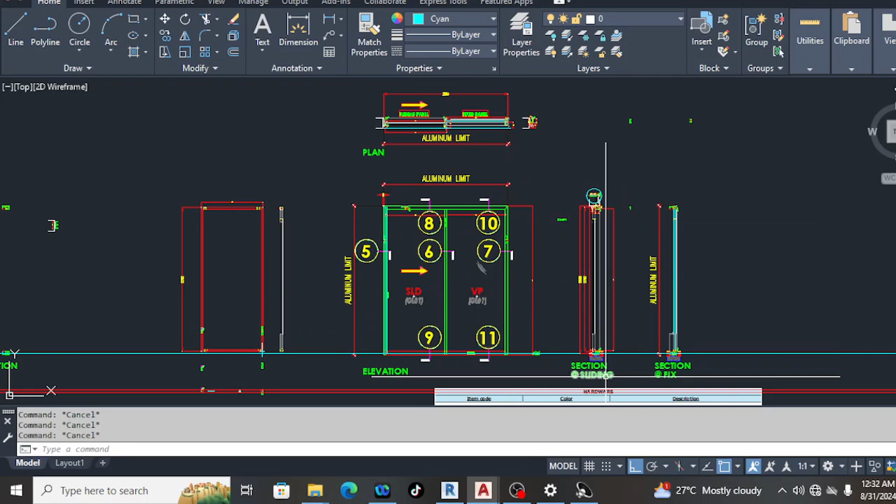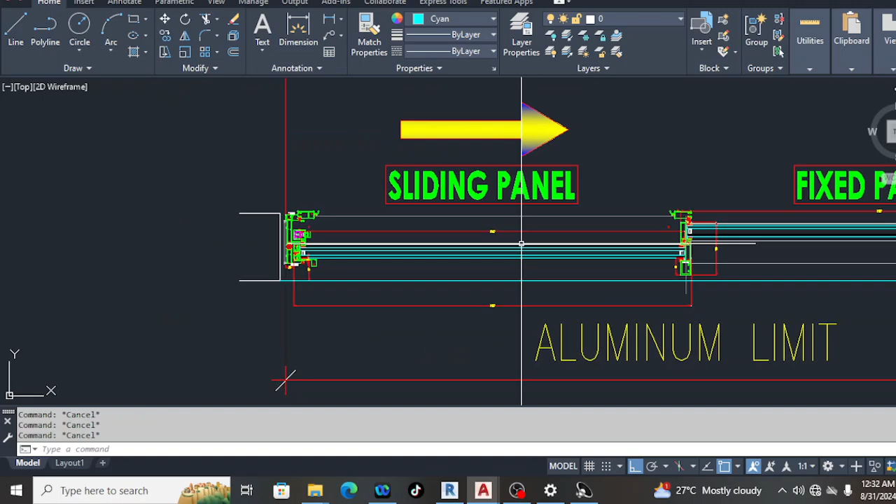I want to share this video about the proper way of modeling sliding doors in Revit. As you can see, this is the elevation of the sliding doors, and we have sections, the sliding section and the fix section. On the plan, this is the sliding panel and this is the fixed panel. It's going to slide left to right, right. This is the detail.

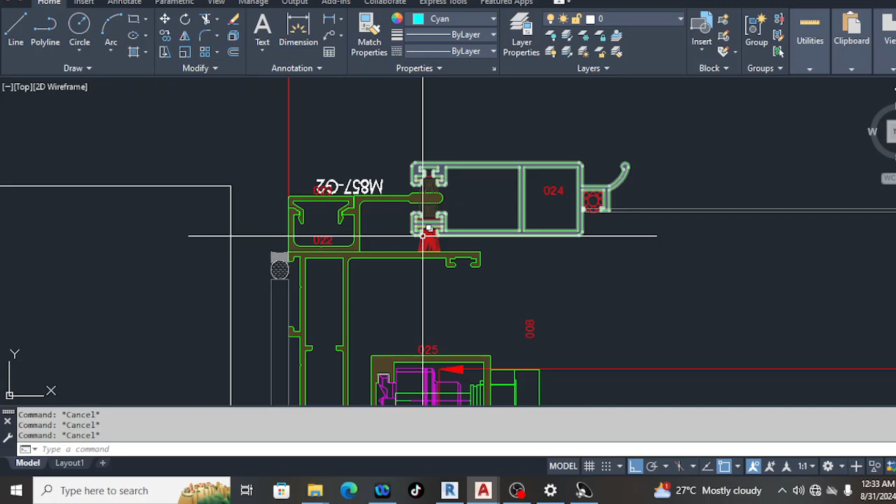We're going to make this AutoCAD detail into Revit. Look at the detail, there's the detail. I did not model the net, the mosquito net, but I modeled the door frames, the outside frames, and the panel frames, the single sliding panel and the fixed panel.

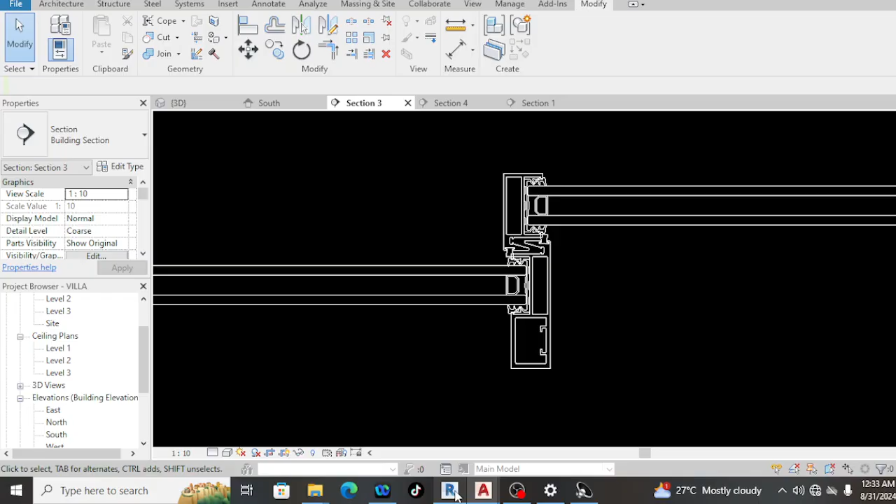And this is our model in Revit. As you can see, this is the interior, exterior. This is the proper way of modeling the sliding doors in Revit. When you see the elevation, there's the elevation. You have two sections and one plan.

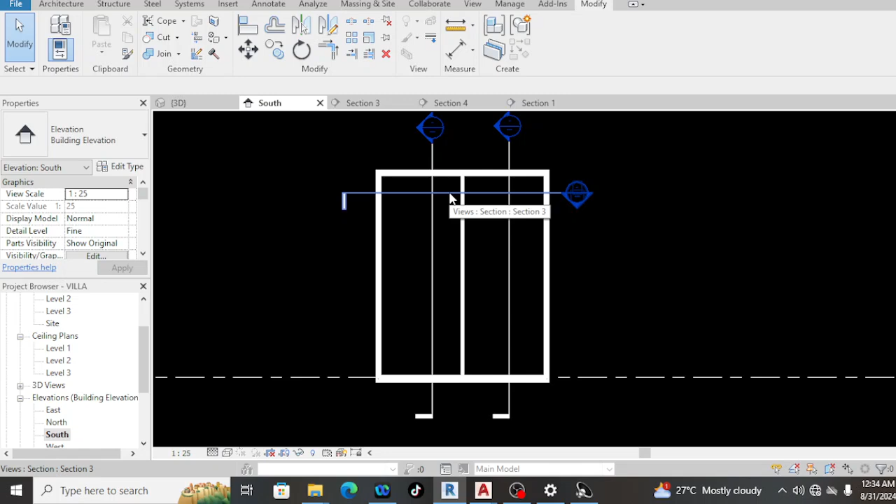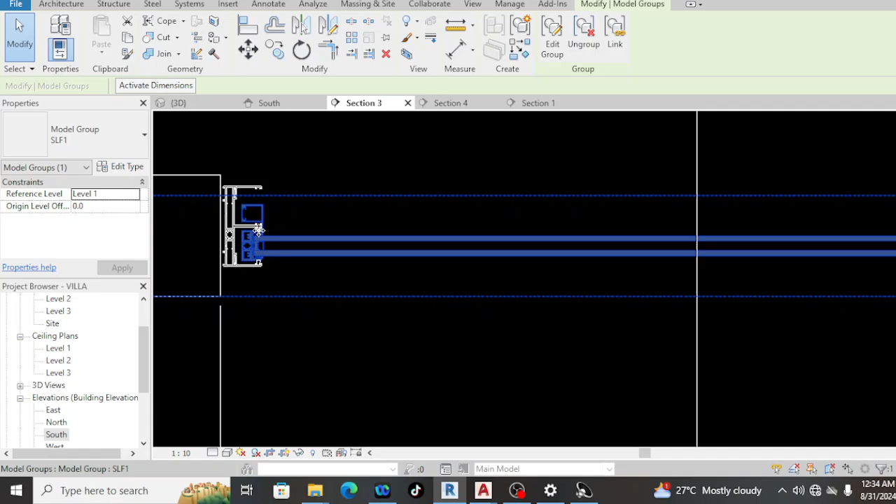Let's go to the view of the plan. You have the sliding panel. We have the detail of the sliding panel here. As you can see, this is the outside frame and this is the sliding panel.

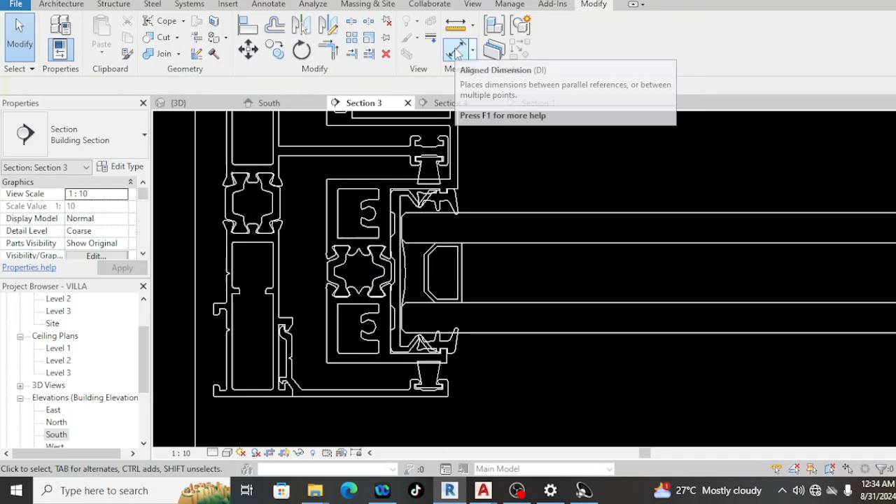Let's look at the glass. We can model and dimension the glass. Let's dimension the glass from here to here. The thickness of the glass is 8, and the total thickness of the glass is 32.

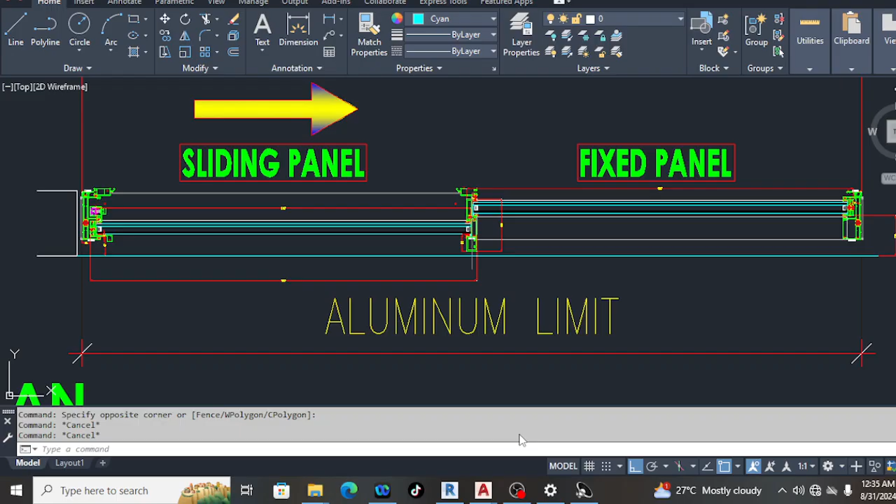Let's go to the AutoCAD file. So 8, the thickness of the glass is 8, and the total thickness of the glass is 32. So we met the requirements. Let's go back to our...

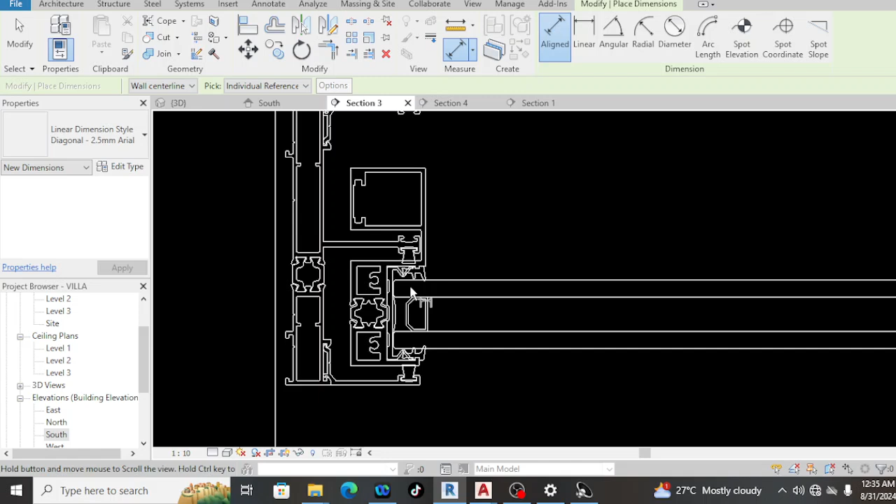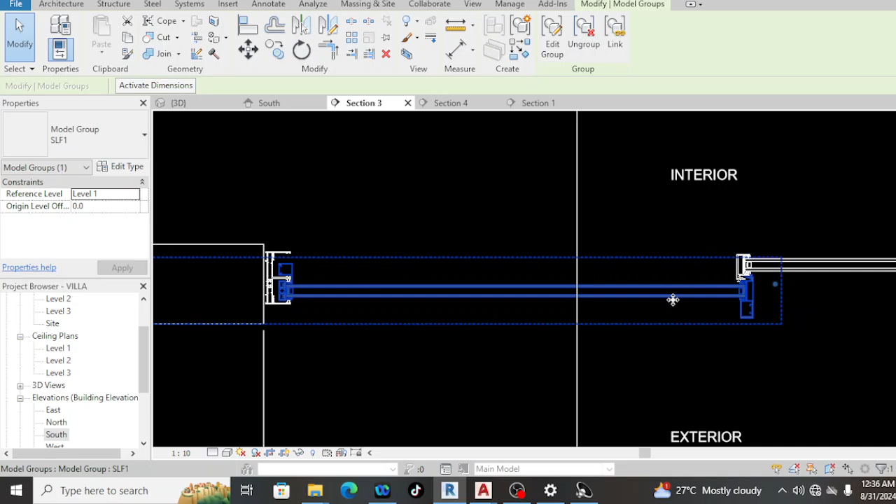Revit sliding panel. As you can see, this is the panel of the sliding doors. When you press the cursor, the arrow to the left of your keyboard, just press it, it's going to move. It's going to slide to the right.

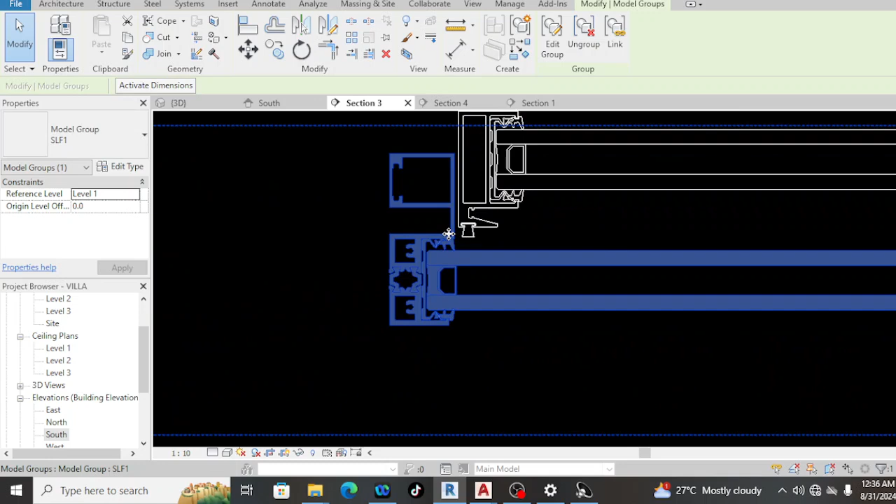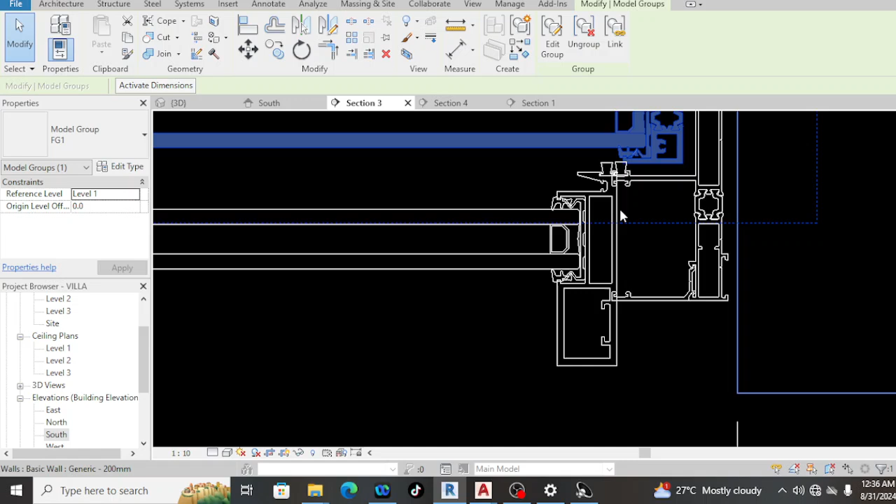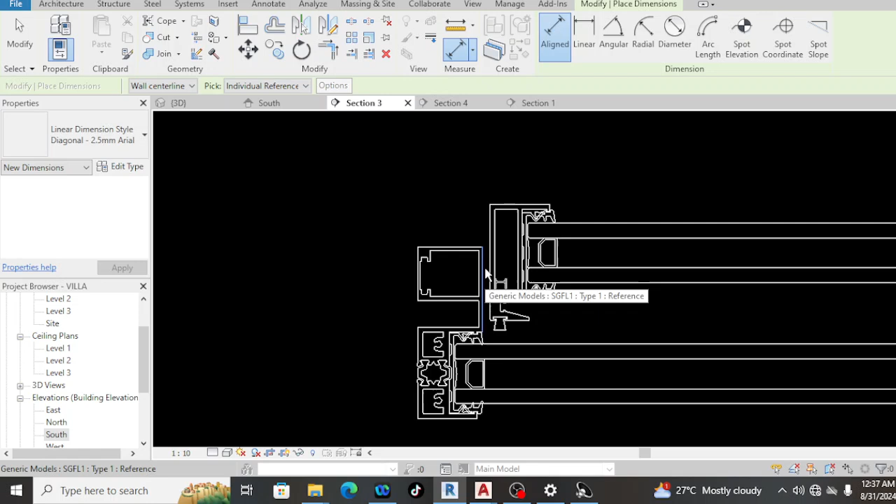And while sliding to the right, look, there's the stopper. So see, it's going to stop here when it's going to clash on the face of the fixed panel. We're going to look before the clash is going to hit, there's a gap of 4 mm between the sliding doors and the fixed panel.

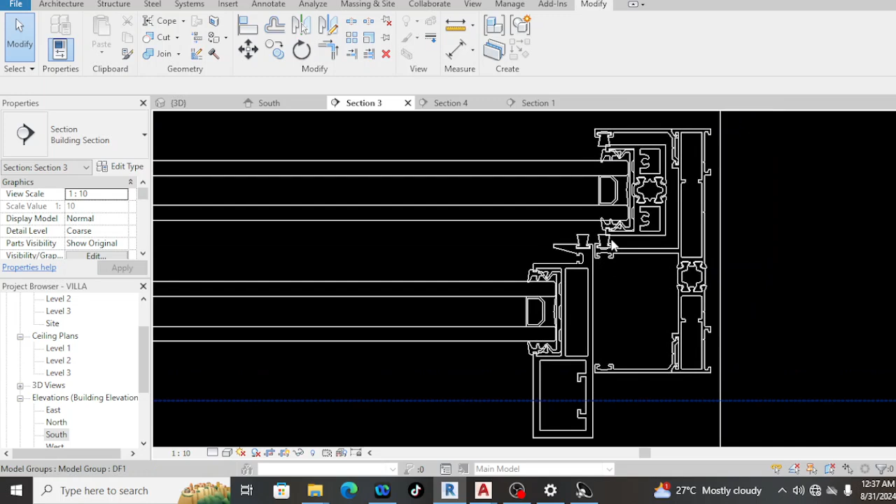There's the detail, here's the detail of the door frames. Let's go to the elevation. This is the elevation. As you can see, let's press again the arrow key to the left. Look, it's going to move. So this is a parametric family.

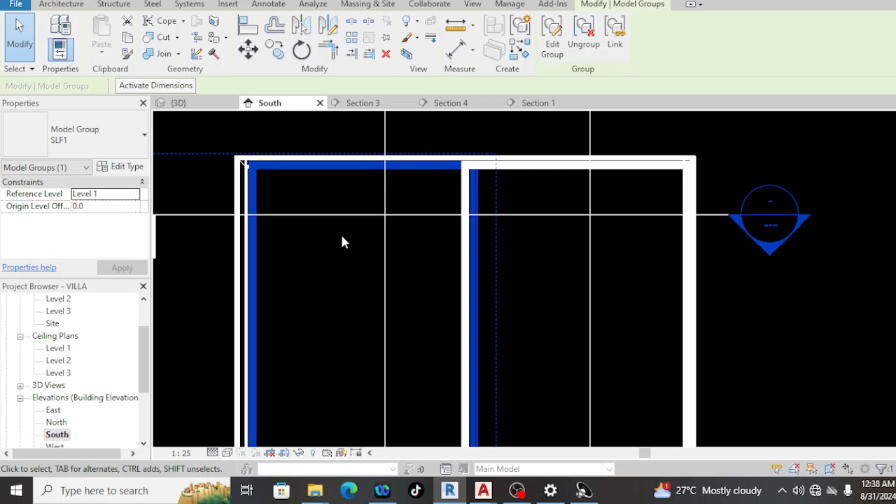We have a pane, the sliding pane. When you press the arrow key to the left or the right, it will slide. Let's look at the stopper in the middle of the detail, mid detail of the sliding doors. Let's go to the plan again, the view of the plan. It's going to hit at the stopper.

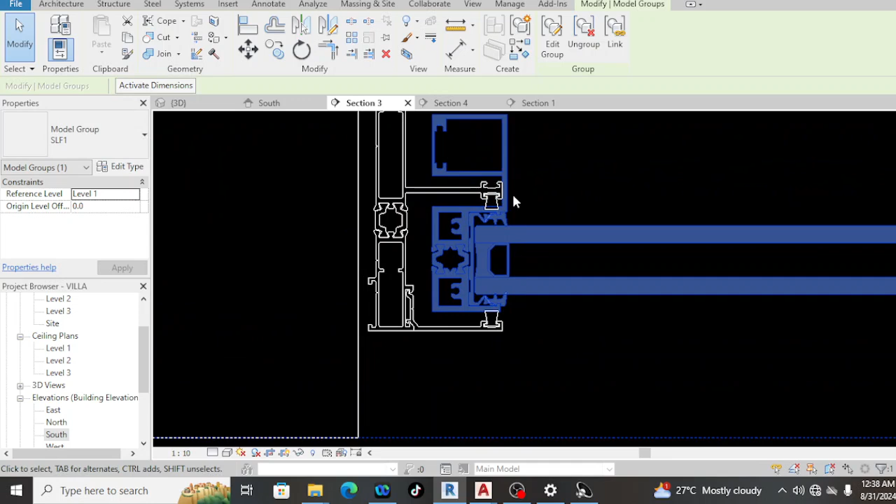There's the stopper. Look, before it hits here, it's going to stop. Look at the mohair brush, even the mohair brush I'll model it. The gasket, there's the gasket, also the spacer for the glass.

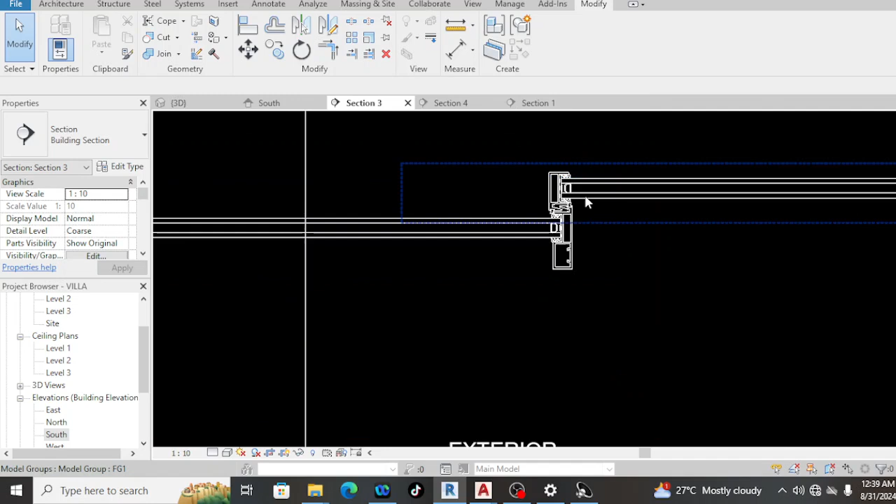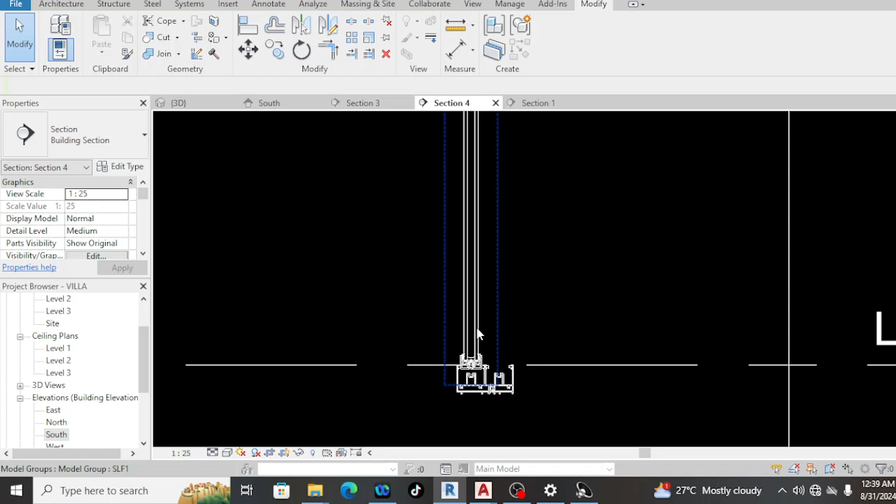Let's go to the section. When you look at the section of the sliding panel, this is the sliding panel. I did not model the roller, there's a roller on this part so that the sliding panel will smoothly turn left to right, smoothly open. This is the top detail.

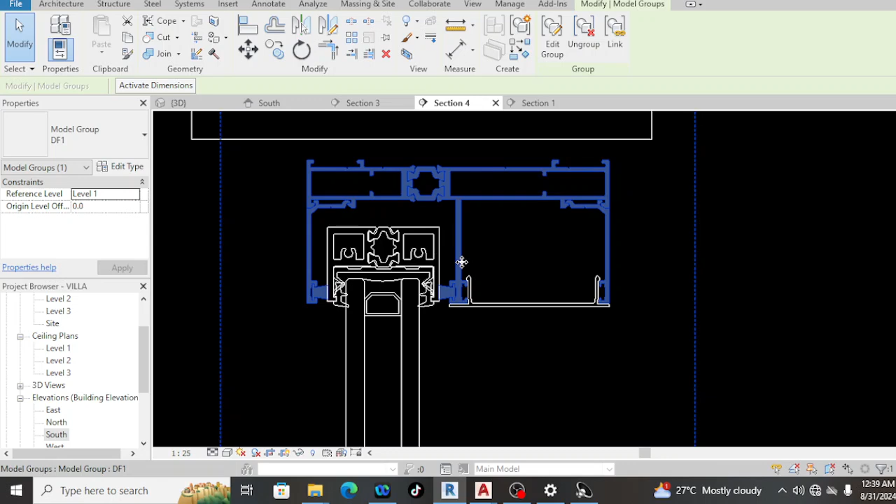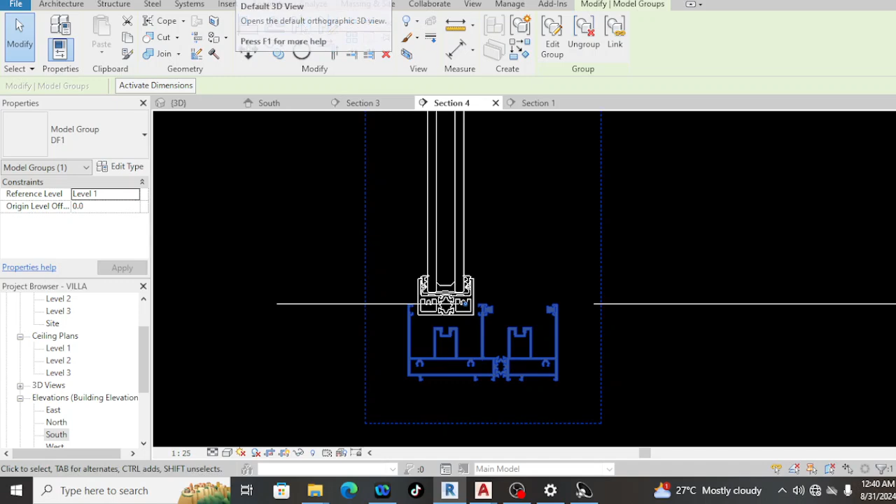As you can see, when you click the outside frame, it's one detail. Let's go to the 3D. When you click the outside frame, it's one entity. There's the outside frame, the outside frame and the sliding panel.

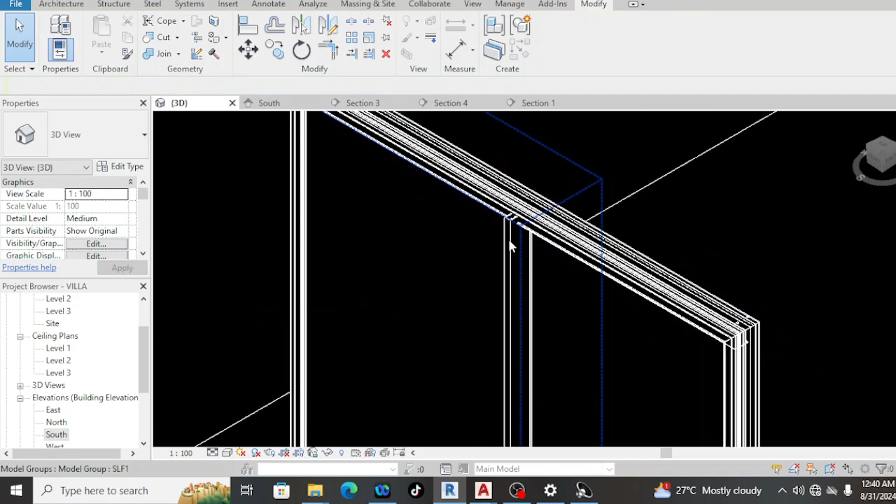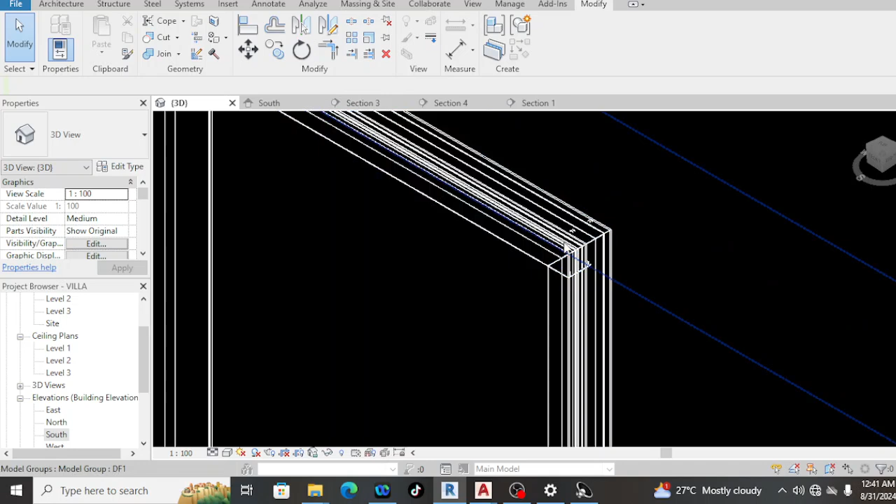Let's see the sliding panel. There's the sliding panel, and here's the fixed panel. Where's the fixed panel? Let's pick the fixed panel. There's the fixed panel, guys.

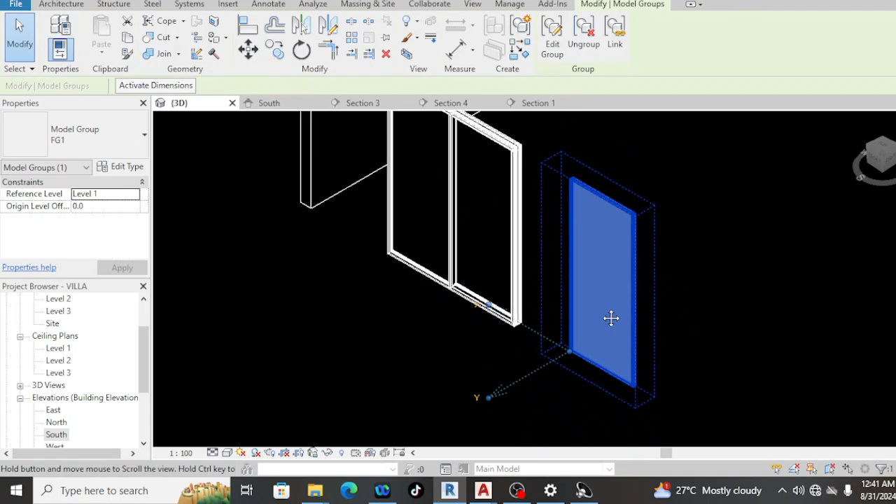We can move it. Let's copy the fixed panel here, let's copy one. So this is an assembly of the fixed panel. Also, we can copy the assembly of the outside frame of the sliding doors. Here it is.

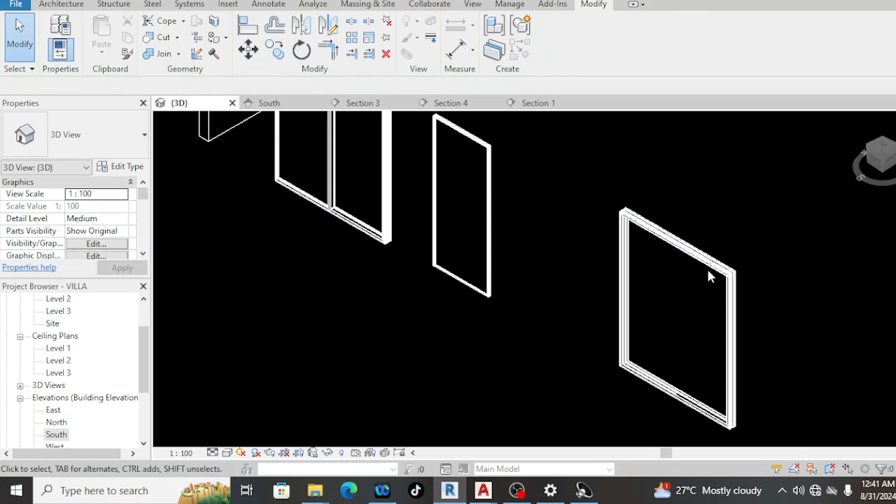And the sliding panel also, there's the sliding panel, we can copy it. There's the sliding panel. Look, so guys, this is the proper way of making a sliding door. Also, it's the same when you're going to make a sliding window, it's almost the same. This is the proper way how to do a Revit model of...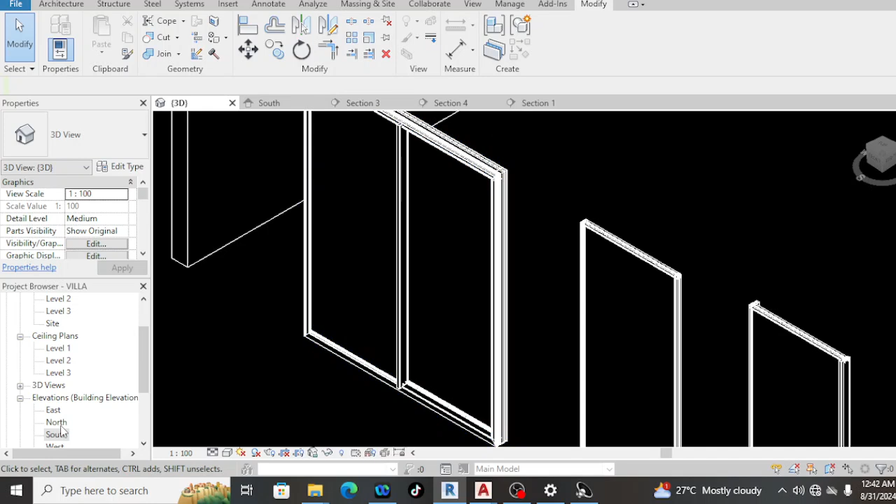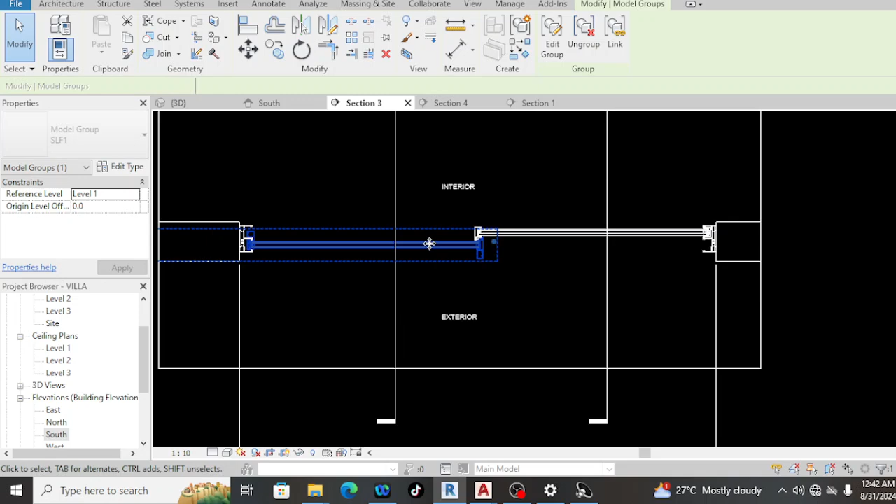sliding doors. When you go to the front elevation, as you can see, there it is. Let's go to the plan. You can see the elevation of the plan of the sliding window. Just press the arrow key to the right. It will slide, this is a perfect parametric panel, sliding panel.

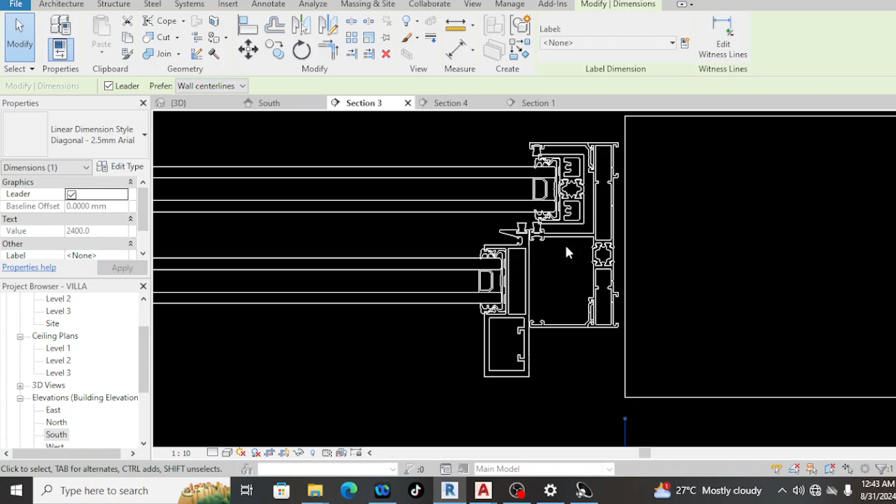You can see, look, there's the detail. I detailed also the gaskets, the spacers, there's the spacer. The thermal break, the thermal break. The mohair brush, how about the mohair brush? This is a mohair brush, these two.

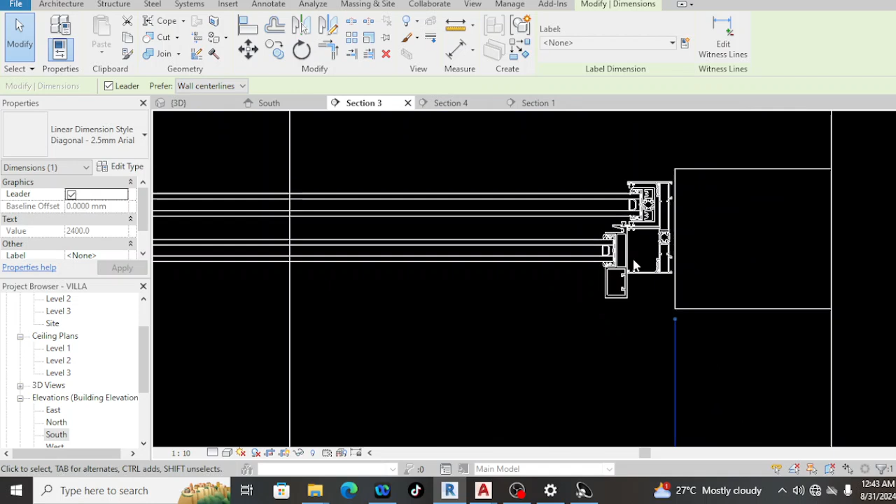As you can see, when you click it, let's go to the elevation, there's the sliding panel. How about in the 3D? Let's go to the 3D, there's the 3D. Let's click the sliding panel, there's the sliding panel. And again, press the right arrow key. It will slide perfectly.

As you can see, when you press to the left, the X and Y is there, the X and Y is appearing. This is the proper way how to make a sliding door in Revit.